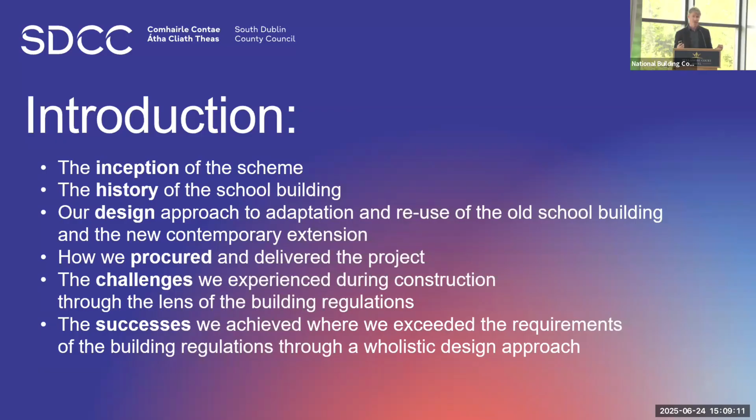So what we're going to look at in this presentation is the inception of the scheme, the history of the school building, our design approach to adaptation and reuse of the old school building and the new contemporary extension, how we procured and delivered the project, the challenges we experienced during construction through the lens of the building regulations, and to finish it off on the successes we achieved, where we exceeded the requirements of the building regulations through a holistic design approach.

So this is Saggart Schoolhouse Community Centre. It's created by the adaptation and reuse of the vacant protected structure of St. Mary's National School, which you can see on the right of the screen. And it involves a new entrance and reception, service area and multifunction hall, which have been added to the original school building. And this creates a vibrant new community centre for the growing residential area of Saggart.

So a bit about the history. St. Mary's National School was vacant since 2014, and it was at risk of falling into disrepair. The original school was completed in 1937. It was one of the first in a series of national schools by the OPW, designed by Raymond Boyd Barrett - no relation to Richard Boyd Barrett in case you're wondering - and it is a protected structure. SDCC identified the opportunity to save and revitalise this as an important part of Saggart's heritage by purchasing the school building. And that's a photo from 1989, which you can verify by the car in it.

So this is the existing school as we purchased the site, and we observed that the old St. Mary's National School doesn't address the road. You can see some back garden wall, which is not good urban design as we would regard it. So the school sits around the corner of the site behind another site. So we wanted to extend the school to readdress it back to Saggart Village.

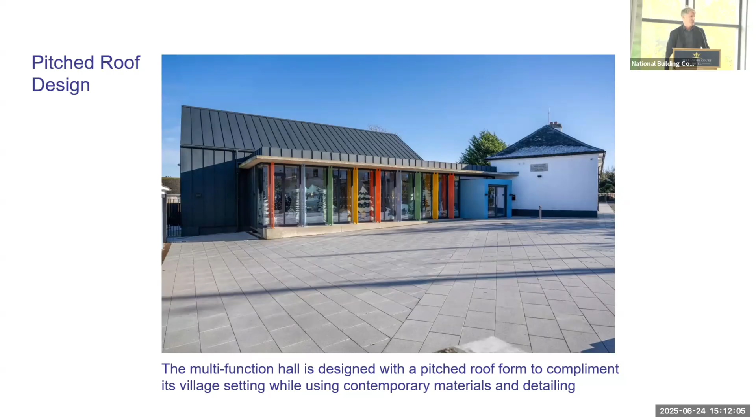The multifunction hall is designed with a pitch roof form to complement its village setting while using contemporary materials and detailing. So the pitch roof form speaks to the pitch roof form of the school, and we made very effective use of this powder-coated aluminium cladding and roofing system, which we are quite pleased with the outcome of.

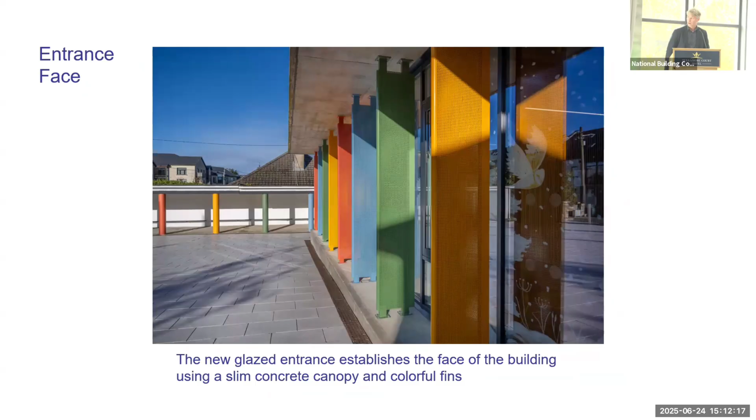So the new glazed entrance establishes the face of the building using a slim concrete canopy and colourful fins.

The old school building has been restored, upgraded, and repurposed in consultation with the SDCC conservation officer, Aidan McNamara. And because this school was a relatively simple building, we were able to take a practical approach to conservation and reuse.

A couple of points of note on conservation: the windows in the existing building were PVC, so we replaced them with slim, elegant, heritage-style timber sash windows, which were quite successful. The original wall is pebble dash, so we painted and reinstated that.

The roof slates were a particularly small kind, so they were all taken off, and reclaimed ones were reinstated on the front and sides of the building, while broken ones were replaced by replicas to the rear. So once again, it's balancing conservation with practicality.

Moving inside the building now, this is the new entrance, reception and community cafe, which you can see has the colour theme running from the outside to the inside of the building, and this faces back out onto the public space.

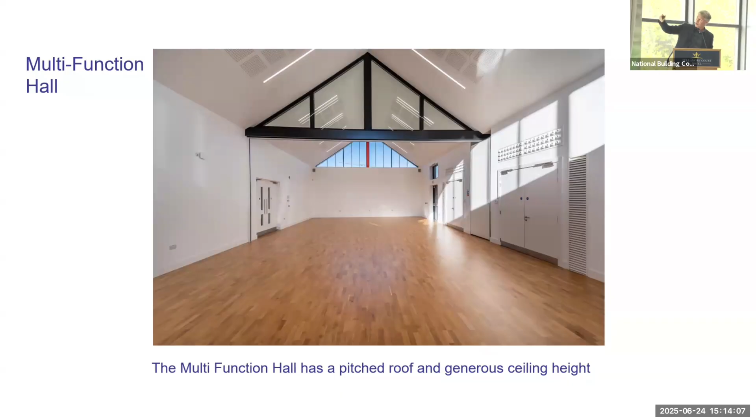The multifunction hall has a pitched roof, and this allows it a generous ceiling height internally, while also limiting its mass on the site and within the village setting and by the school. This is used for large community events, well-being and exercise classes, and yoga. It can also be subdivided into two mid-sized spaces.

Moving into the old school building, the original classrooms have been repurposed to provide bright, spacious meeting rooms. These have proved very successful spaces, and we were very pleased with the outcome of these.

Although I think the contractors put that board in upside down—if you look closely, the writing's upside down. And the original timber floors and timber ceilings were restored.

We took a special interest in the different textures of the walls, and wanted to retain them and make a feature of them. You can see the rough texture of the original wall, the cast dado, and these were map rails that they used to hang drawings and documents on. This creates a very nice feature in the classrooms, and it's contrasted with the smooth new plasterboard above.

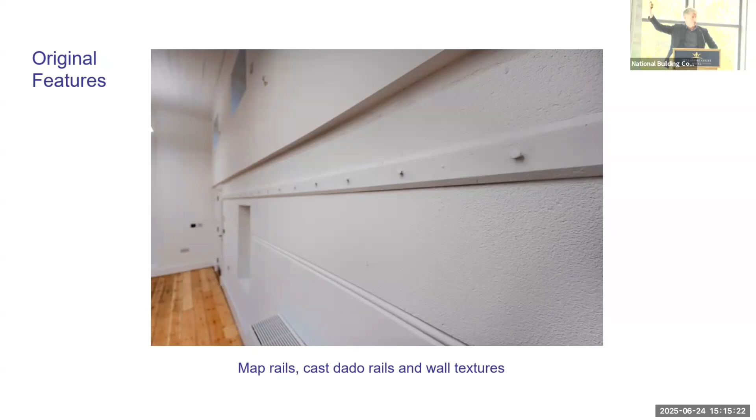The corridor floor tiles have been retained and restored, and they've got all the character of the near century of use that they've experienced. Yeah, that's quite a characterful floor in the corridor.

The original stone name plaques and threshold stones have been restored and reinstated. And that's not a defect, those blotched out bits—that was during World War II when they scratched out the place names so invading armies could get confused. So that's part of the ongoing history.

All of these features come together to maintain the distinctive schoolhouse character of the community centre, which was quite important to it.

Moving on to procurement and how the project was procured and delivered. We in SDCC designed Saggart Schoolhouse Centre to Part 8 approval in consultation with the community section.

This allowed us to develop and take ownership of the design and develop a brief. We then appointed an integrated design team led by IDOM to deliver the project to completion. IDOM are an international multidisciplinary team, and the architects EOR were based in London—Viral Bashfar and Amanda Impey—and they provided a very attentive service on this scheme.

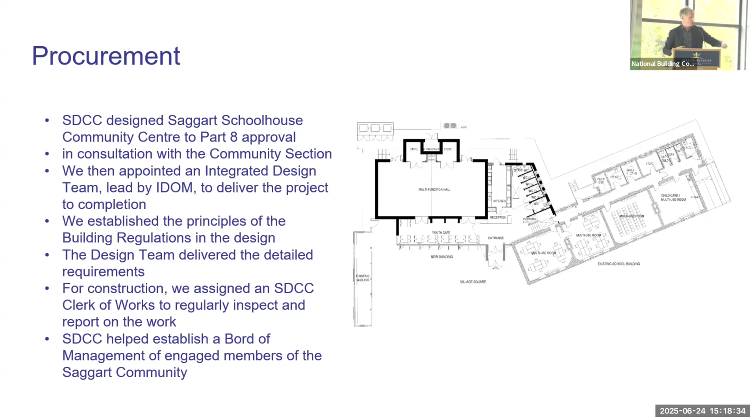Now, this is the perilous part of the presentation. We're going to move into the challenges section, and what challenges we experienced on site. What I'll reference in particular is materials and workmanship.

To put it into the context of the building regulations, Part D notes in relation to existing buildings: in the case of material alterations or material change of use, the adoption without modification of the guidance in this document may not in all circumstances be appropriate. Buildings of architectural or historical interest are especially likely to give rise to such circumstances. In these situations, alternative approaches based on the principles contained in the document may be more relevant and should be considered. So what that's saying, in particular relation to historic buildings, is it's not taking an entirely prescriptive approach, it's about using the principles of the building regulations.

In some cases, where it might just be a repair or a replacement, you could take the 'not new or greater contravention' approach, but where we're doing a full refurb and extension here, we want to meet those standards and exceed them where we can.

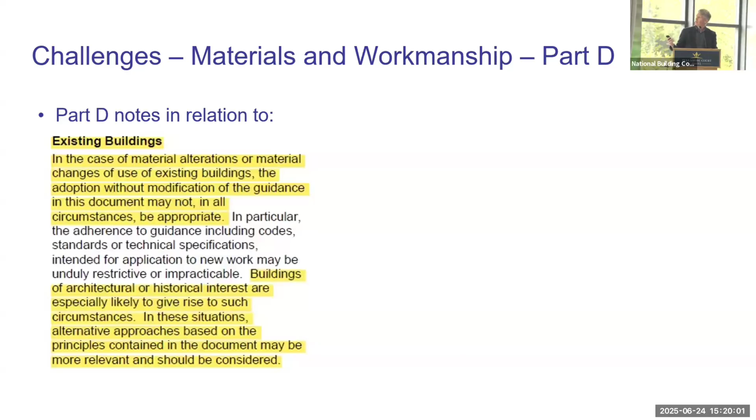Early in the construction stage, we became concerned about standards of health and safety and workmanship on site. Good health and safety standards on site are a good initial indicator of an effective contractor.

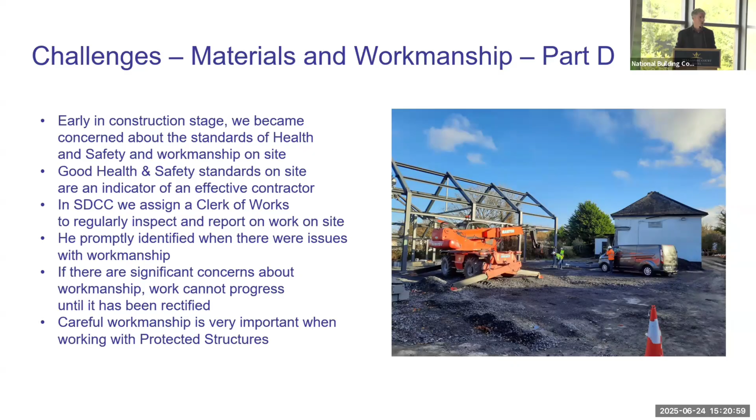In SDCC, we assign a clerk of works to regularly inspect and report on work on the site. In this case, we appointed a very attentive one, Darren Solon, and he promptly identified issues with workmanship. If there are significant concerns about workmanship, work cannot progress until it has been rectified. In particular, in relation to protected structures, workmanship is very important and has to be kept a very close eye on. You can see the steel frame of the new extension being erected there in the early stages.

The site manager, who's kind of a linchpin on site, was not the one whose CV was provided in the contractor's tender.

The ER issued a defects notice. When there is a significant defect on site of concern, a defects notice is the way to document that. The contractor then had to provide a method statement of careful repair to the damaged wall, which then had to be agreed and overseen.

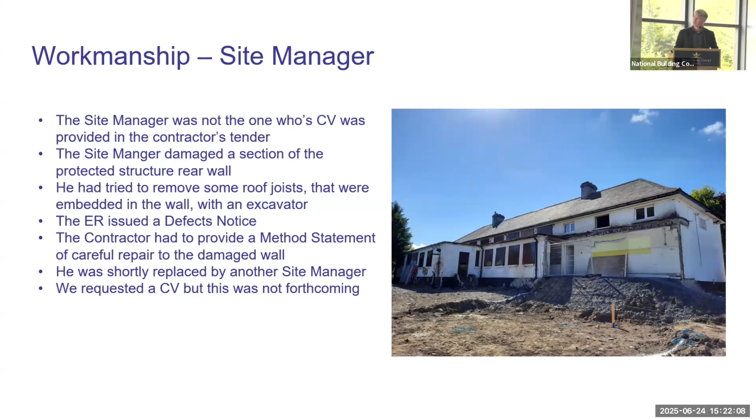He was replaced shortly by another site manager. We requested a CV for this site manager, but it wasn't forthcoming.

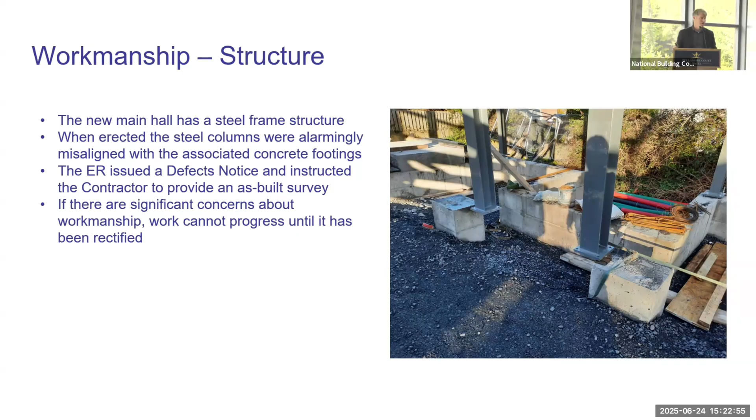The ER issued a defects notice and instructed the contractor to provide an as-built survey so they could ascertain where this issue had arisen. As I mentioned, if there are significant concerns of workmanship, that element of work cannot proceed until it is resolved.

Working with the county architect, Cian Hart, we arranged an emergency meeting with the ER and the contractor to address our concerns. The contractor replaced the second site manager with the one whose CV they had provided on tender, and he turned out to be significantly more effective. On site, a site manager is really a hinge point of the whole build, so it's important that they are effective.

So we set out the key performance requirements of health and safety, conduct, quality and workmanship, program, and budget. The contractor had to meet and address all of these before moving on to address the next item, in order of magnitude.

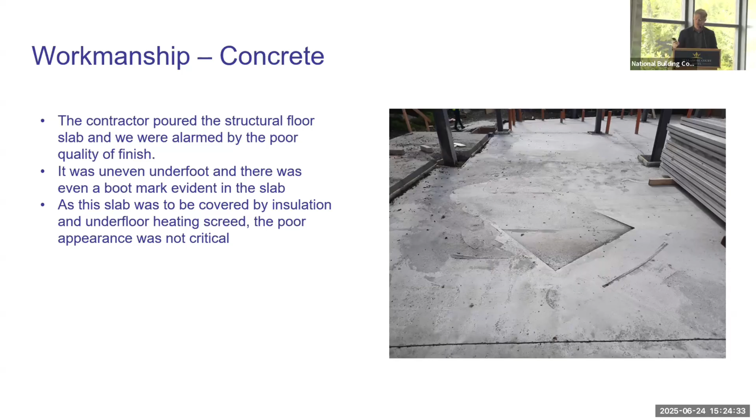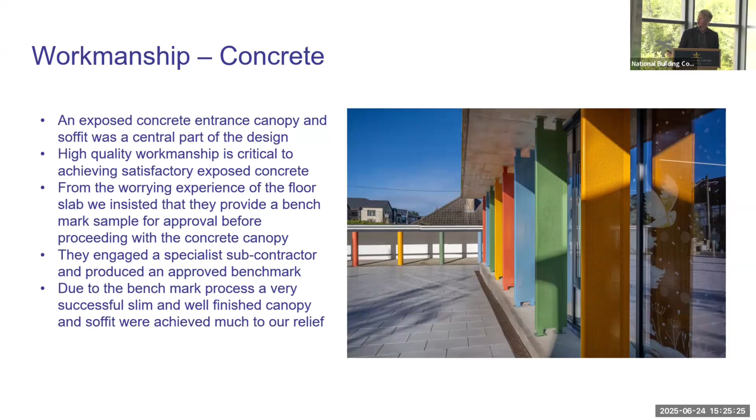But an exposed concrete entrance canopy and soffit was a central part of the design, and high quality workmanship is critical to achieving satisfactory exposed concrete. So from the worrying experience of the floor slab, we insisted that they provide a benchmark sample for approval before they were allowed to proceed with the concrete canopy. They took heed of this, fortunately, and engaged a specialist subcontractor who produced an approved benchmark. Due to that benchmark process, and our absolute focus on quality, a very successful, slim and well-finished canopy and soffit were achieved, much to our relief.

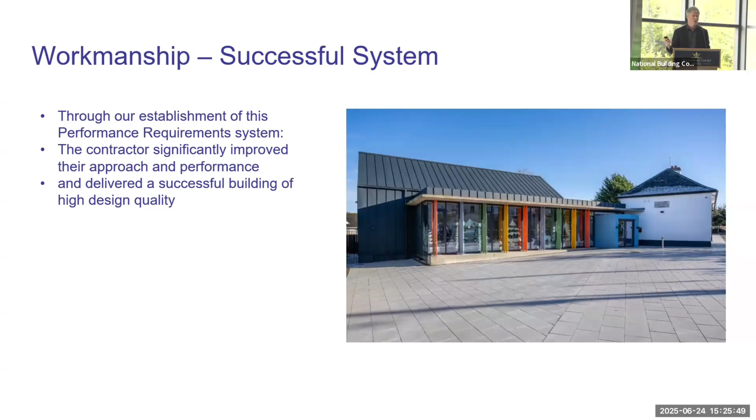So in summary, through our establishment of this performance requirement system, the contractor significantly improved their approach and performance and delivered a successful building of high design quality. So there was a happy ending to that challenge. I know it was looking ropey for a while, but it came good in the end.

And now moving on to the successes. We've talked about the challenges, now we'll talk about the successes.

Accessibility and inclusivity are important to SDCC, so we were looking to exceed Part M in a holistic manner where we could. We applied the principles of accessibility to inform the design and response to the site, and it was designed to make the existing protected structure more accessible.

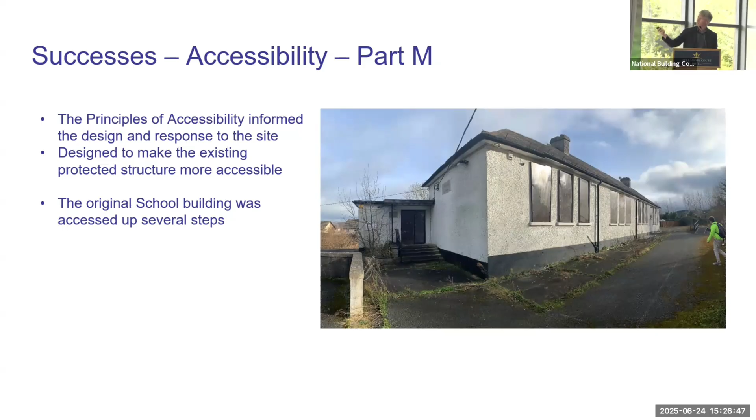In this section, there were several steps up to this entrance, which was the original boys' entrance to the school, which obviously would not be accessible in this day and age. So we set the new entrance at the lower ground level of the site to provide level access, and this also helped the design in that it kept the mass and height of our large multifunction hall structure lower on the site, because we wanted to keep it below the ridge line of the original school, not to dominate it.

So there you can see the principles of accessibility and design working hand in hand to inform each other.

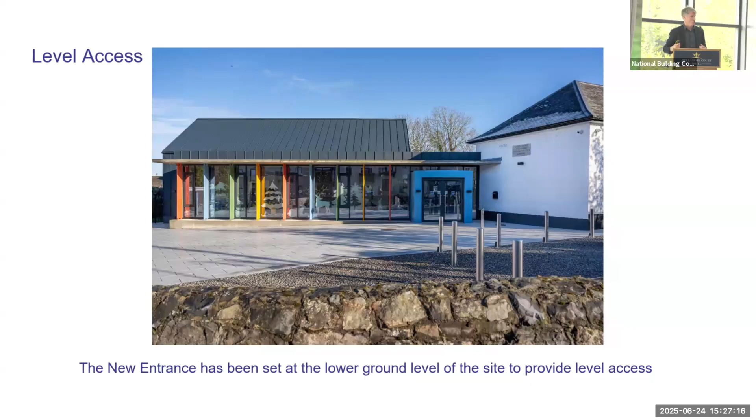At the upper end of the site, the old school building is also accessible, working with the gently sloping topography. This was the original girls' entrance, but you'll be glad to hear they're no longer segregated. This classroom is now a childcare room, so it can act as an independent access point for that section of the building, which is quite useful.

There's also, up at this end of the site, a natural play area, which once again links very successfully back to the childcare room.

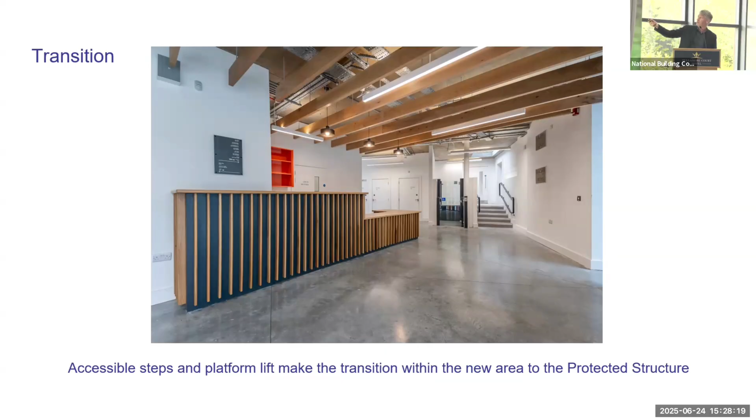Inside, accessible steps and a platform lift make the transition within the new area to the protected structure. You can see two of the reinstated plaques up on the wall there, for the girls' school and the boys' school. A full suite of accessible WCs and facilities have been provided in both the new and the original building.

And there's one of our blackboards which we've put in the new area.

The building is also a community centre, socially inclusive and accessible for all ages and levels of mobility. This is the childcare room and the converted classrooms, which allow for active age groups. Because we were designing this during the pandemic, we made a pivot in design to have two of the classrooms work as remote working hubs, and the cafe is also used as a youth cafe, so we're covering multiple generations there.

Another success was the conservation of fuel and energy, relating to Part L but also broader. The scheme is sustainable through the conservation and adaptive reuse of the vacant protected structure of St. Mary's National School, which would have fallen into dereliction. That isn't necessarily what Part L deals with, which is more about energy usage, but that's the first point of sustainability of this project—reusing and upgrading an existing building. This is a protected structure, so demolition was not an option, but with existing buildings there's embodied carbon to consider. If a building can be reused, that's step one in your sustainable journey.

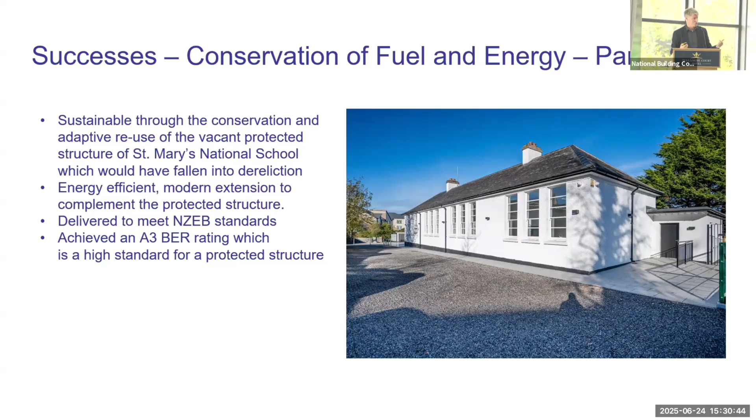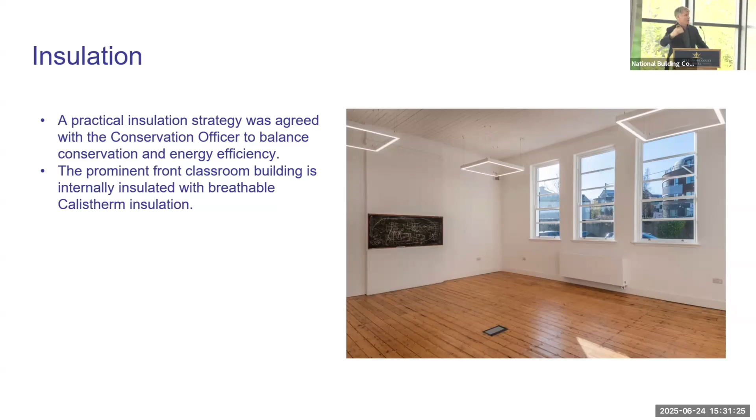So we took a practical insulation strategy, which we agreed with the conservation officer. For the prominent classroom building to the front, we didn't want to externally insulate because of the distinctive pebble dash finish. But we also noted that while the school building is a protected structure, it's quite a simple building, so there were no overly ornate features that you'd be concerned about covering up inside. So we internally insulated the external walls of the main classroom building, prioritizing the external appearance, using a breathable conservation-specific calistherm insulation.

The less visible rear service wing is externally insulated. This is where energy efficiency and practicality take over from conservation, which takes precedence at the front—here the balance moves towards energy efficiency and practicality because we're looking at visibility. So the rear service wing is externally insulated to optimize effective insulation and maximize the small room sizes. If we'd internally insulated there, the rooms would become smaller. These are the rooms providing our WCs, stores, and offices for the old school building.

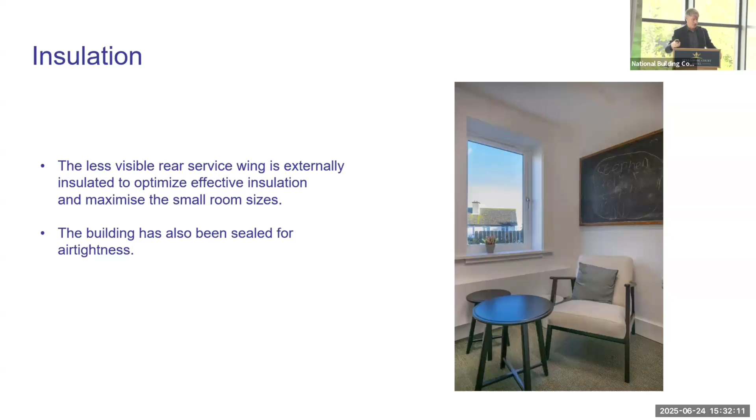Finally, the site has been designed to be self-sufficient in surface water management, which is important to SDCC, along with flood resilience for climate resilience. The site was largely covered with impermeable tarmac, so we removed and replaced this with softer, more permeable surfaces where practical. The front area is gravelled with a geogrid for the vehicular and parking area, with paved areas focused on the public and service spaces. We also provided a sedum roof on the new flat roof, which provides attenuation and also biodiversity.

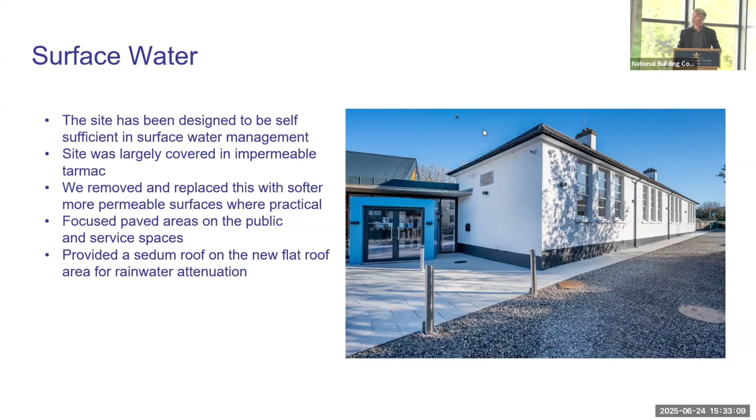So we've covered some of the successes. In conclusion, we've discussed our design approach to adaptation and reuse of an old school building and the new contemporary extension, how we procured and delivered the project, and how this formed our relationship with the building regulations, the challenges we experienced during construction, and the approaches to overcome these challenges—the performance requirement system we applied—and the successes we achieved, where we exceeded the principles of the building regulations. In this case, accessibility and conservation of fuel and energy through a holistic design approach. This allowed us to deliver a successful Saggart School community centre building for the community, and ultimately, that's what it's all about. Thank you.